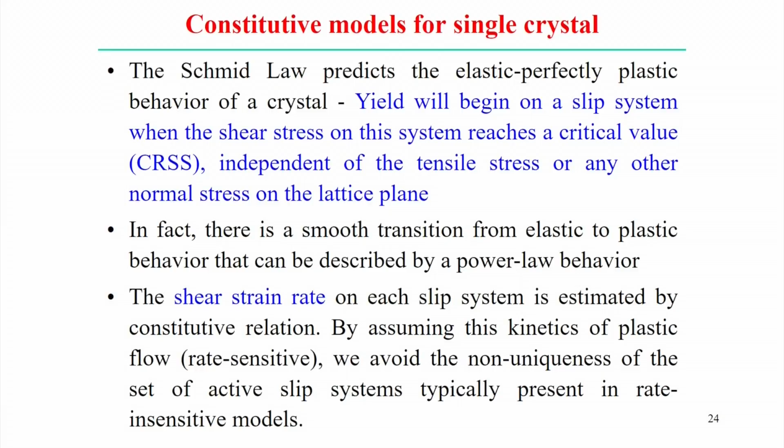Another significant point here, when you try to analyze the deformation behavior, the rate of the strain is more important on the slip system, and that can be explained by the constitutive relations. By assuming the kinetics of plastic flow, which is rate sensitive, we can avoid the non-uniqueness of the set of active slip systems that is typically present in the rate insensitive model. So there are two significant things: whether the deformation is rate sensitive or rate insensitive.

Typically, in plastic deformation over a continuum scale, we express the relation between stress and strain either by the strain hardening coefficient n, sigma equal to K epsilon to the power n, or, if we consider a strain rate sensitivity index, we explain the relation between stress, strain and strain rate. A similar philosophy can be used here to explain the plastic deformation of the single crystal structure.

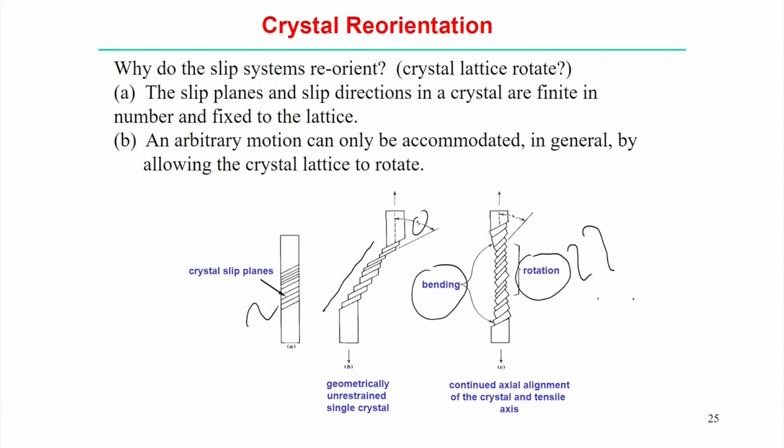And with respect to each and every slip plane, when different slip planes are sequentially active, from one slip plane to another, they will try to reorient with respect to each other. So this is the philosophy of the plastic deformation for a single crystal structure when several slip planes are active.

Now, how to form the constitutive models for a single crystal structure? Here the target is to analyze the constitutive model we have explained in the continuum plasticity models. Similarly, plastic flow in a single crystal is anisotropic, so it cannot be modeled using a simple constitutive equation. This plastic anisotropic behavior is not straightforward to model, because in this case a more complicated constitutive law is used which considers the slip activity in the crystal directly.

Let us see how we can develop this constitutive model in the case of the single crystal structure. The main application of the constitutive equation is to model the rotations of individual grains in a polycrystal, and hence to predict the evolution of texture and to account for the effects of texture on the development of anisotropy in the solid. The main reason for the anisotropy actually comes from the texture formation.

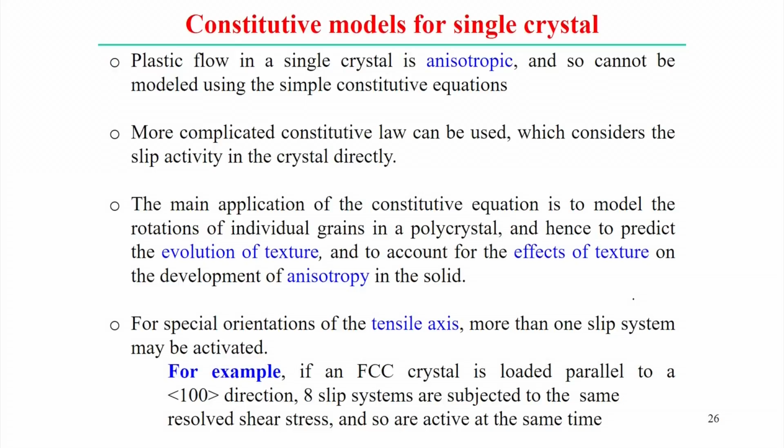For example, if an FCC crystal is loaded parallel to the 1, 0, 0 direction, that is any one of the axes of a unit cell, 8 slip systems are subjected to the same resolved shear stress and so are active at the same time. This is a typical example that several slip systems may be active depending upon which direction the load is acting.

In a tensile test oriented for single slip, the crystal rotates so as to align the slip direction with the loading axis. Eventually, the crystal rotates far enough to activate a second slip system. The exact point where this occurs depends on how the crystal hardens.

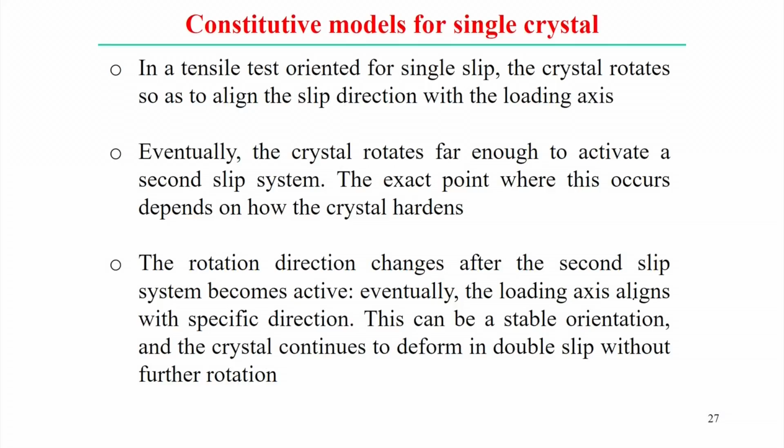The rotation direction changes after the second slip system becomes active, and eventually the loading axis aligns with some specific direction. This can be a stable orientation and the crystal continues to deform in double slip without further rotation. All these points signify how, with the application of load, the slip planes reorient with respect to the first and second slip planes, and how they configure so that it is accommodated by the amount of rotation. Taking all this into account, it is better to explain how the models work.

Now, for a single slip system, if we apply the minimum work principle, we can derive that the normal stress by shear stress, sigma by tau, is equal to the ratio of the shear strain rate to the normal strain rate, represented by 1 by m, where m is cos phi cos lambda, the direction cosines with respect to the defined axis in the crystal system, which we have already derived. So sigma equals shear stress by m, where m we can consider the Schmid factor.

This is the one factor that depends on the orientation of the axis with the slip direction, normal to the slip plane, and the tensile axis. So, as already defined, if a polycrystal is subjected to some amount of deformation with random orientation of the crystals, the Taylor factor for orientation dependence is simply estimated this way. The Taylor factor is basically the ratio of the incremental shear strain with respect to the incremental normal strain, and that is the ratio sigma x by tau, that is normal stress by shear stress.

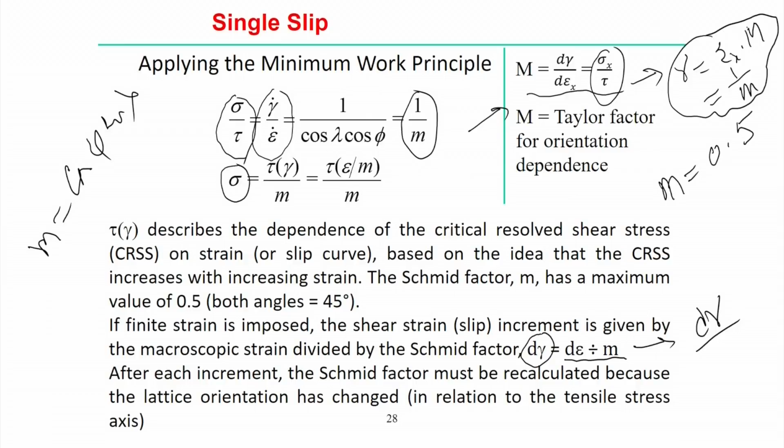And each time we recalculate the factor m because the orientation changes with respect to the slip plane or the tensile stress axis. Once we recalculate all these things, we can accumulate the total amount of strain and use the correlation to link stress and strain, whether it is the normal stress or the shear stress component.

Now, we will focus on the analysis of the plastic deformation of the single crystal structure. Selection of the slip system for rigid plastic models: rigid plastic models means that we are just analyzing the deformation of the plastic part without the effect of the elastic component. Assumptions for fully plastic deformation: the elastic deformation rate is usually small compared to the plastic deformation rate and can be neglected. But the elastic strain is limited to the ratio of the stress to the Young's elastic modulus.

A perfectly plastic material is where the equivalent stress is basically the initial yield stress. For most metals, the initial yield stress is 2 to 4 orders of magnitude less than the elastic modulus, so that ratio is very small compared to 1. So, once the elastic deformation rate is considered, it is reasonable to model the material behavior using the rigid plastic model. The plastic strain rate is given by the sum of the slipping rates multiplied by the Schmid tensor.

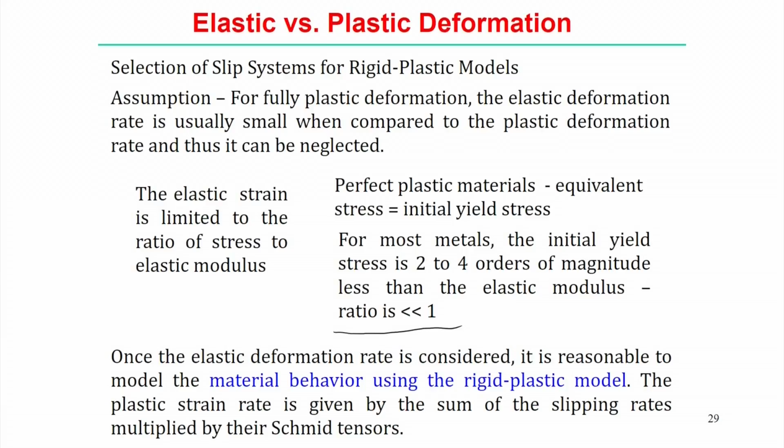But when you try to estimate the total increment of plastic strain, in this case we can sum it up over the different slip systems, and accordingly we can estimate the rate by looking into the Schmid factor for all these cases. Now, here also we can implement the von Mises yield criteria in the plasticity model.

The number of possible active slip systems in cubic metals is greater than the number of independent components of the strain rate tensor, that is represented by dP from the mathematical point of view. Any combination of the 5 slip systems that satisfy the incompressibility condition can allow the prescribed deformation to take place. So, we have discussed the requirement that at least 5 slip systems are active at a time, so that it can maintain the incompressibility condition.

The requirement that at least 5 independent slip systems are required for plastic deformation is known as the von Mises criteria here. But if less than 5 independent slip systems are available, the ductility is predicted to be low in the material. The reason is that each grain will not be able to deform with the body and gaps will open up, that means it will crack. So basically the compatibility condition is the main issue.

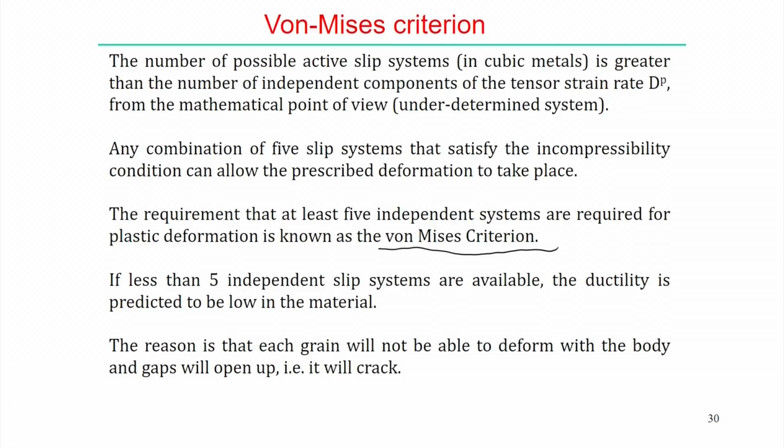Now, we will look into the hardening rule in the crystal plasticity model. Here the resistance of each slip plane to shearing increases with plastic deformation, and that is due to the strain hardening effect. The typical stress strain curve for a single crystal structure we have already discussed, and we observed that at stage 3 of the deformation, at large strain, the hardening rate actually decreases, and that happens due to dynamic recovery. So these are the typical observations from the stress strain curve of a single crystal structure.

Now, how to use the hardening rule in the single crystal plasticity model? First, we consider that shearing on the alpha system increases its own strength, defined by G alpha, and this is known as self hardening. Self hardening in the sense of the increment of the strength level due to a specified shearing operation on a slip system, but at the same time this slip system can also affect the deformation behavior of the other slip systems.

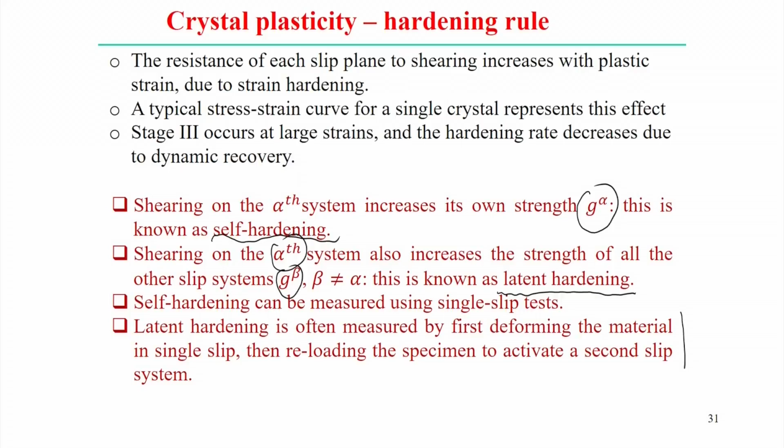So once we can measure the self hardening and latent hardening, we can use them to form equations to predict the hardening behavior of a single crystal structure. Latent hardening is often quantified by the latent hardening ratio, which specifies the ratio of the strength of the second system to that of the first system.

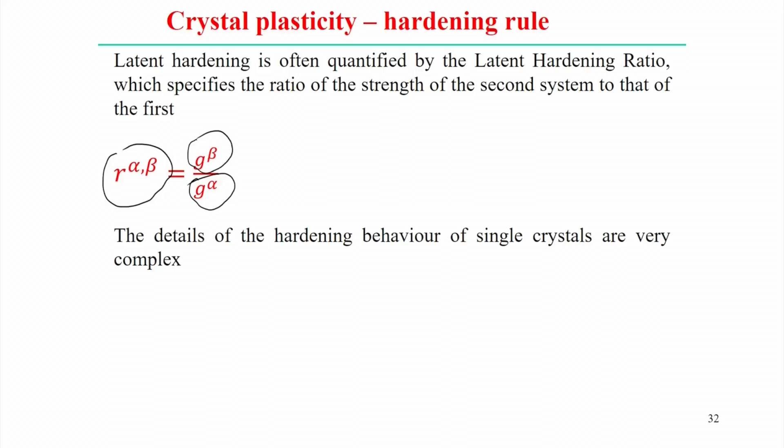So latent hardening ratio R can be defined as the strength of the second system over the strength of the first system. So this ratio we can use, but it's not necessary for the several slip systems that the ratio should always be maintained as a constant. So therefore the details of the hardening behavior of a single crystal structure in general are very complex in nature. So this was just the idea that probably we can use hardening like a continuum plasticity model for a single crystal structure also.

As a part of the crystal plasticity theory, the constitutive equation must specify the relationship between the stress measures and the deformation measures. So, in particular, the constitutive equation must relate the elastic part of the deformation gradient to the stress, and the rate of shearing on each slip system to the resolved shear stress. So, specifically here we are trying to focus on the rate of shearing on each slip system and the corresponding resolved shear stress. So, this constitutive equation will always try to capture these two effects, the elastic component as well as the rate dependency of the hardening effect.

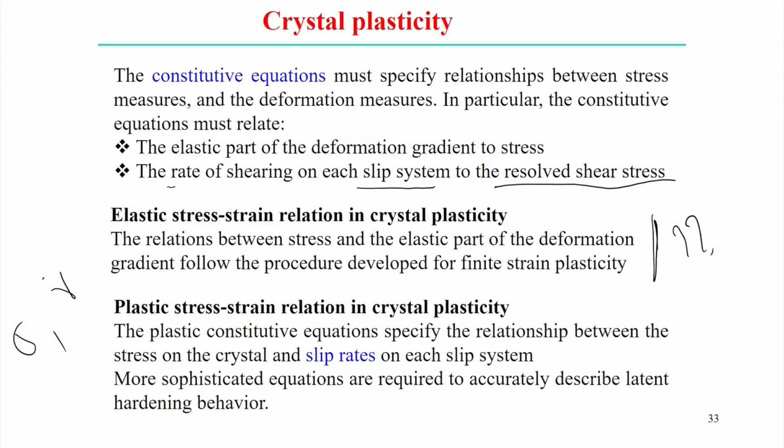But if we see the elastic stress relation in crystal plasticity, we have already explained the elasticity in the single crystal structure. The relation between the stress and the elastic part of the deformation gradient follows the procedure developed for finite strain plasticity. So, that theory we have explained. And now the plastic stress relation in crystal plasticity is more significant here, because the plastic constitutive equation specifies the relationship between the stress on the crystal and the slip rate on the slip system. So, crystal plasticity tries to correlate these two quantities. Therefore, more sophisticated equations are required to accurately describe the latent hardening behavior to model crystal plasticity or single crystal structure.

Now, in a single crystal structure, the flow rule can be decided like this. Consider the viscoplastic flow to predict the slip rates in a single crystal structure. So, we consider the viscoplastic behavior of the material to predict the slip rates. We always try to focus on the slip rate dependence, which avoids having to use an iterative procedure to identify the active slip system. It is difficult to track the individual slip system in terms of the single strain rather than strain rate. So, when you try to capture the slip rates, or in terms of the strain rate, it is more representative than the deformation behavior in terms of only a single strain component.

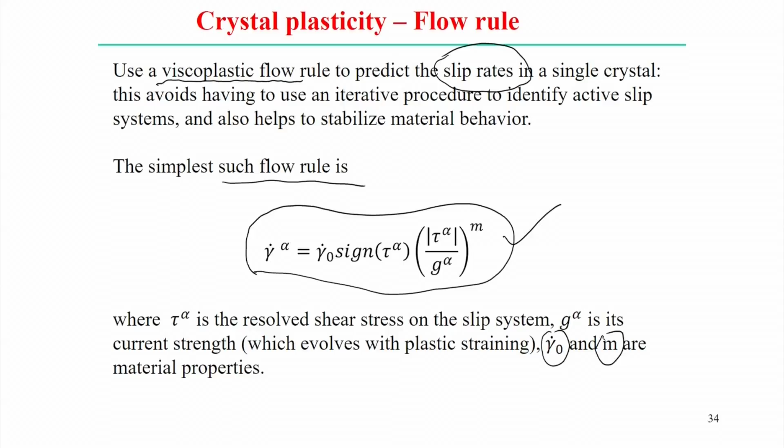So, this is one of the simplest flow rules generally used, and we see it in terms of the rate, and this rate is significant because we have considered the flow of the material as a viscoplastic flow. So, for this viscoplastic flow of the material, we can use this relation, where tau is the resolved shear stress on the slip system, G is the current strength which evolves with the plastic straining, and gamma 0 dot and M are material properties. So, M is not the Schmid factor here; it is another material constant and depends on the properties of the material. So, these are the typical flow rules we can use in the crystal plasticity model.

Now, going further into the crystal plasticity model, the hardening rule must specify the relationship between the slip system strength and the plastic strain. That also is obvious, the system strength and the plastic strain should be correlated, and that is better represented by the hardening rule. So, at time t equal to 0, each slip system has the same initial strength G0 if we assume that. Therefore, the slip system increases in strength as a result of the plastic shearing according to this equation.

So, here you see H alpha beta are the strain dependent hardening rates, and the hardening rate is approximated by this curve, H equal to R alpha beta, where H is a function of the total accumulated slip on all slip systems. So, gamma bar is the total accumulated slip on all slip systems, and here the hardening rate is approximated by this. So, basically the hardening ratio and the functional form of this hardening curve are with respect to the total accumulated slip on all slip systems.

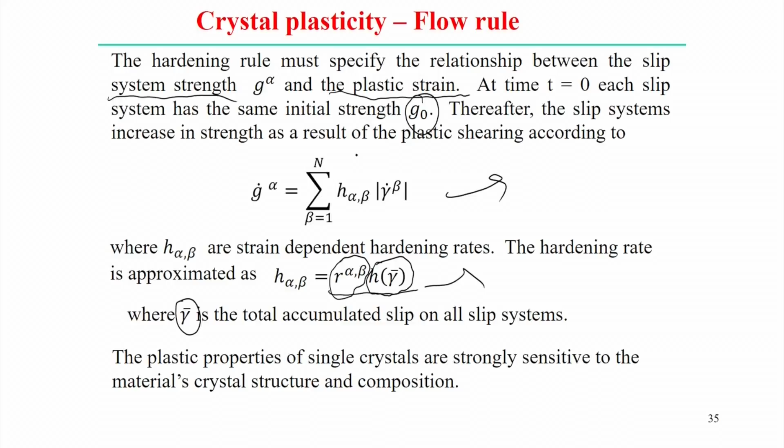Therefore, the plastic properties of a single crystal are strongly sensitive to the material crystal structure as well as the composition. So accordingly, we can derive different types of curves that represent the rate of hardening. I am not going into the details of how we can do that, but rather we can focus on the very basic idea of how we can use it.

Now we come to polycrystal plasticity theory. The basic idea is that the theory is built on the physics of single crystal plastic deformation behavior, and we always try to represent the relation between the macroscopic and microscopic quantities in terms of stress and strain. That is the basic philosophy of polycrystal plasticity theory, and in this case the mean field hypothesis is probably more appropriate. Normally we represent polycrystalline theory as the averaging behavior of single crystals. Here we need a mean field hypothesis to build the theory.

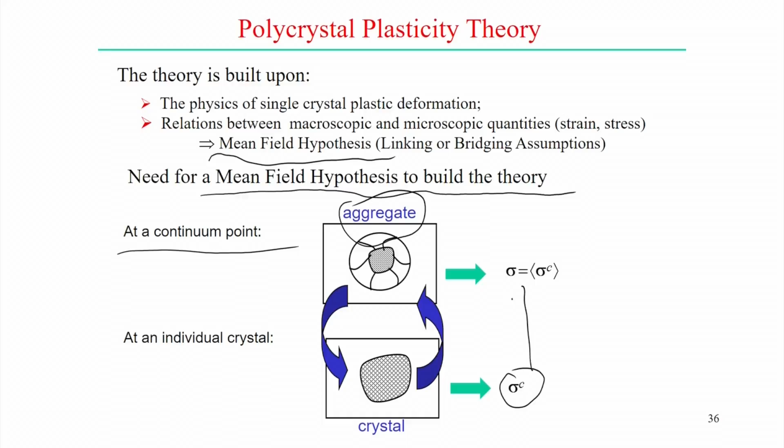So the continuum point represents the aggregate behavior, and we represent the stress component as the average of the individual components. An individual crystal has the stress component sigma c, and when we average over several crystals, we find the average value, and that is true for the polycrystalline structure. There are several field theories also, and using them we can link single crystal behavior to polycrystalline plasticity theory.

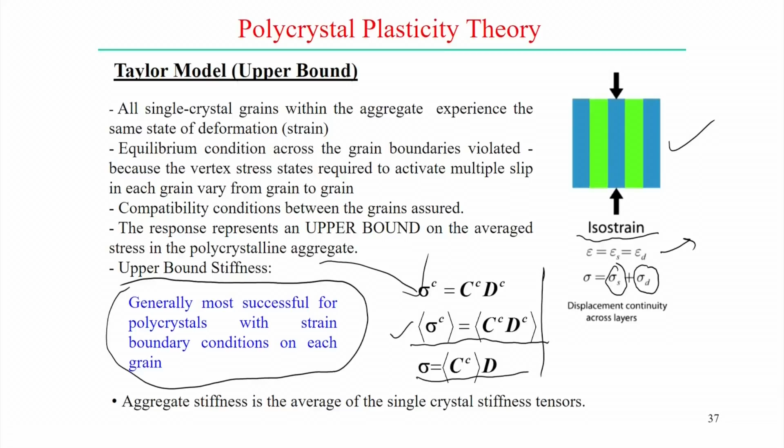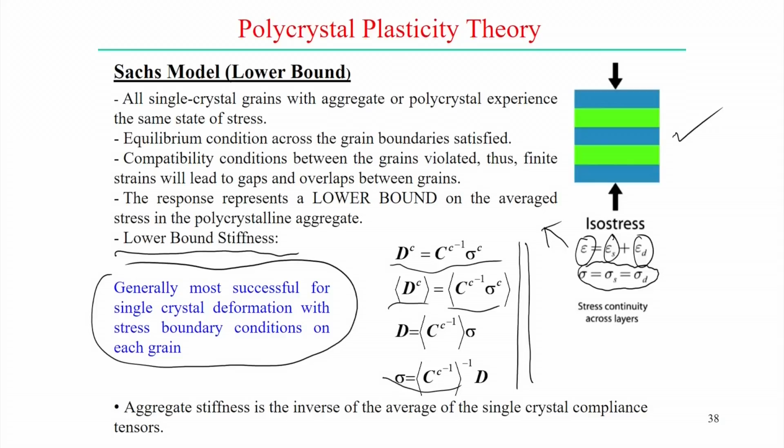If we find out the lower bound stiffness with a similar strategy, we find that the average stiffness is the inverse of the average of the single crystal compliance tensor. So this is the average tensor according to the Sachs model, and the difference between the Taylor model and the Sachs model is only whether we are considering the isostress or the isostrain deformation model. So the Sachs model is generally most successful for single crystal deformation, with the stress boundary conditions on each grain.

Now let us physically try to understand single versus multiple slip. In the first case, on the left hand side, we consider that external stress is applied. Small arrows indicate the identical stress state in each grain, and each grain deforms according to which single slip system is active. That can be better explained by the Schmid factor, relating the normal stress to the resolved shear stress. So that formula can be used when the grains are subjected to external stress, following the philosophy of a single slip system active based on the Schmid factor.

Now if we look into the external strain case, the external strain remains the same. Small arrows indicate variable stress states, but the deformation level remains the same for all the grains, with a variation of the stress state. In this case multiple slip, with 5 or more systems in each grain, satisfies the externally imposed strain. That means when the material is subjected to external strain with variable stress state, multiple slip systems are active, which is necessary to satisfy the externally imposed strain condition, and it can be represented, in the elastic deformation case, in terms of the elastic modulus and the amount of shear strain.

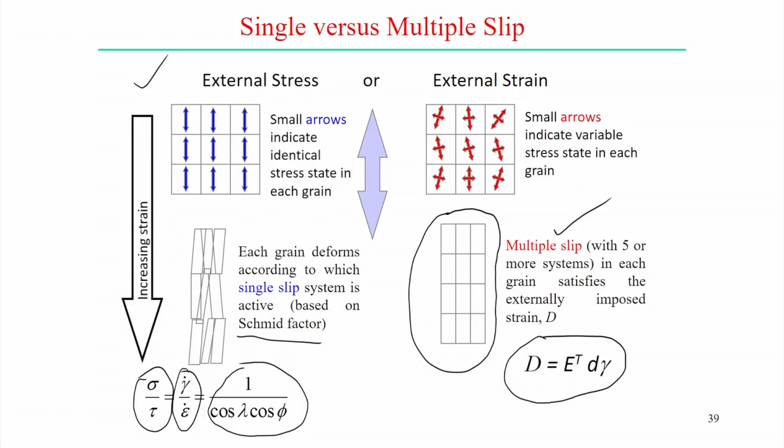So here we have tried to explain the different approaches for polycrystal plasticity models, but I have not explained the details of the models. They can be extended to develop different kinds of crystal plasticity models, or to explain the phenomena we have discussed in a crystal plasticity model. So thank you very much for your kind attention.